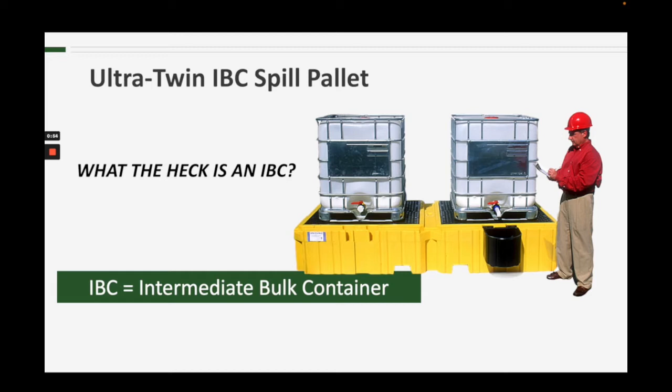Before I get too far, it's probably a good idea for me to answer one question first: what the heck is an IBC? IBC stands for Intermediate Bulk Container. They're also commonly known as totes or tanks. These things right here are IBCs.

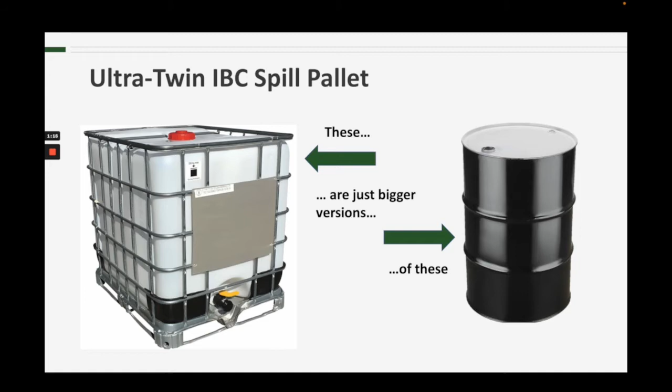IBCs are used for storage of chemicals similarly to 55-gallon drums, just on a larger scale. So in order to capture spills from these larger containers, this IBC spill pallet has a containment capacity of 535 gallons. That means it will comply with EPA spill containment regulations for up to and including 535-gallon totes. I don't think they even make them that big, but if they do, you'll be compliant with this pallet.

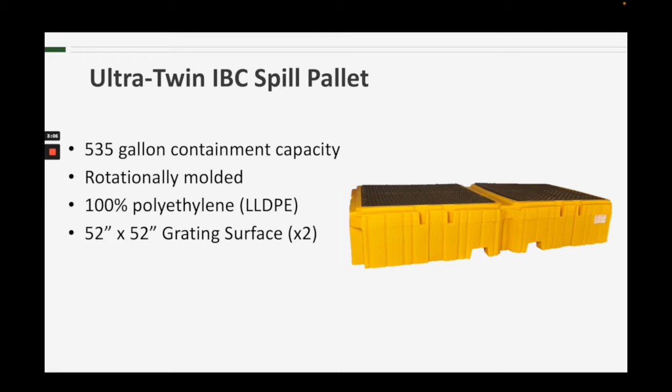As the name implies, this is a spill pallet designed to accommodate two IBCs. It is rotationally molded using linear low-density polyethylene. There are two identical work surfaces where tanks can be placed. Each one is a 52-inch by 52-inch space and can hold up to 8,000 pounds.

Now, I mentioned earlier that the Ultra Twin IBC spill pallet has a containment capacity of 535 gallons. But there's one important item to note in regard to the containment sump. Although it may look like two separate containment areas, it is actually just one large sump. This is very important to know so that any chemicals stored on top of the pallet are compatible. They don't necessarily have to be the same, they just have to be compatible.

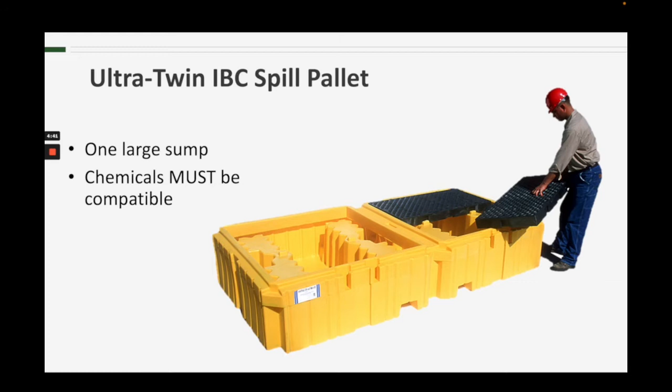Okay, you see these two sets of slots in the front of the spill pallet?

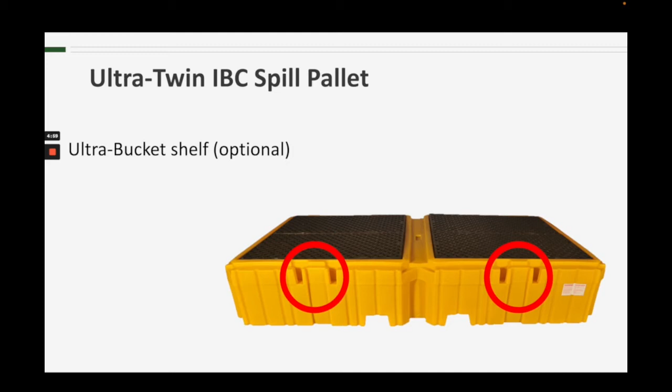Those are designed to hold an optional item we call the Ultra-Bucket shelf. This piece simply slides into those slots and locks into place. Now, when the IBCs placed on top of the twin IBC spill pallet are used for dispensing, the bucket shelf is in place to catch any incidental leaks or spills that may occur.

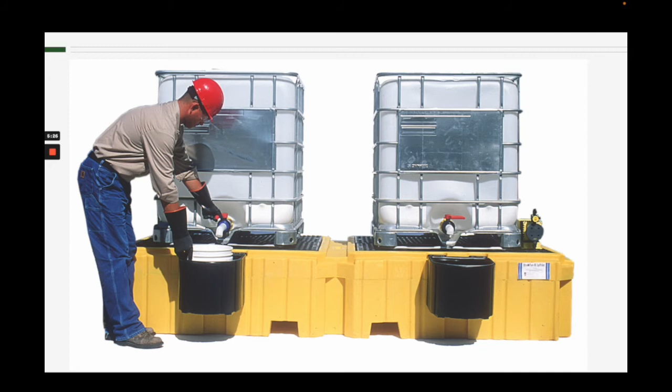But wait, there's more. If the bucket shelf or shelves are ordered with the pallet, we will drill a hole in the spill pallet and a corresponding hole in the bucket shelf. We will also include a bulkhead fitting like this. After the pallet has arrived at its destination, slide the bucket shelf into place and then screw the bulkhead fitting into the two holes. Now, if there's a catastrophic leak or spill, the bucket shelf will first fill up and then eventually start to overflow into the spill pallet sump via that bulkhead fitting.

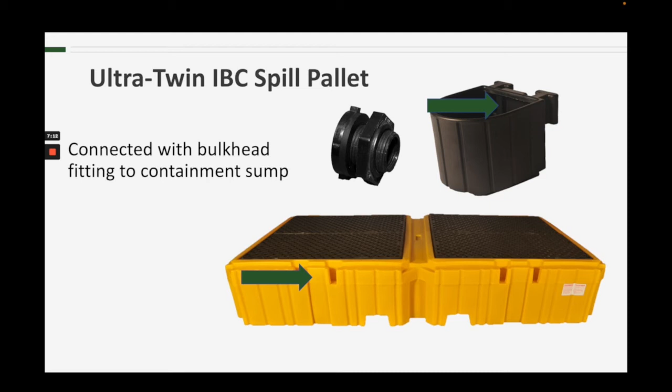Cool, huh? So why would you choose the Ultra Twin IBC spill pallet instead of one of our other IBC spill pallets? Probably stating the obvious, but more than likely it would be because of a need to provide containment for two tanks without having to buy two separate single IBC spill pallets.

Why wouldn't you choose the twin IBC spill pallet? The same reason that makes it attractive could also make it fall short of the top choice. At over 10 feet long, this spill pallet could prove to be a bit unwieldy in a more crowded environment.

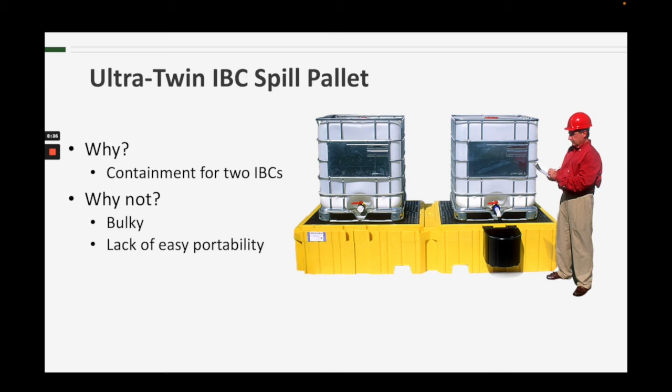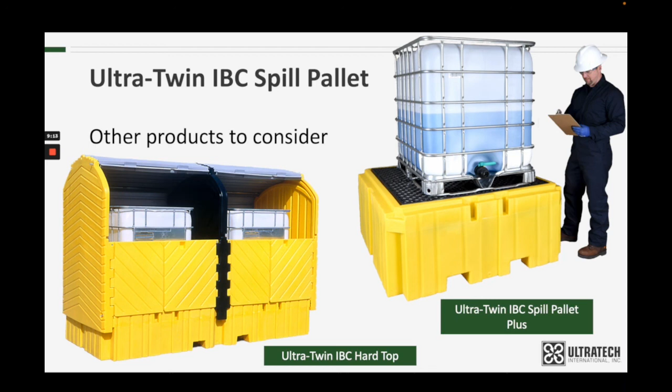Other products to consider? The Ultra IBC Spill Pallet Plus is a top choice for just about any IBC containment application. This option would, of course, require you to buy 2 units to be an equivalent to the Ultra Twin IBC spill pallet. If outdoor or lockable containment is of interest, the Ultra Twin IBC hardtop uses the twin IBC spill pallet as its base, but also has a rotomolded top attached. There are links below to both of these products should you care to look into them further.